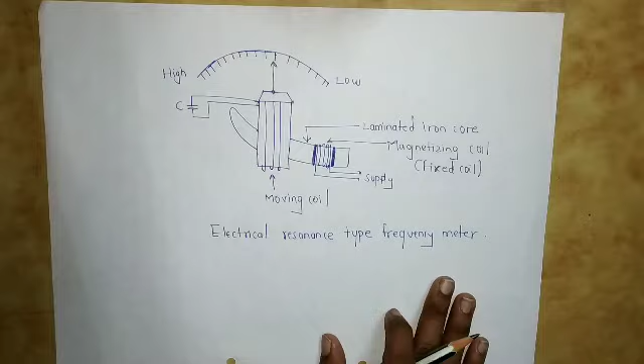We will see the electrical resonance type frequency meter. In the last lecture we have seen the mechanical resonance type frequency meter. Now here, the electrical resonance type frequency meter. A frequency meter is obviously to measure the frequency, right? So we will see the construction and working.

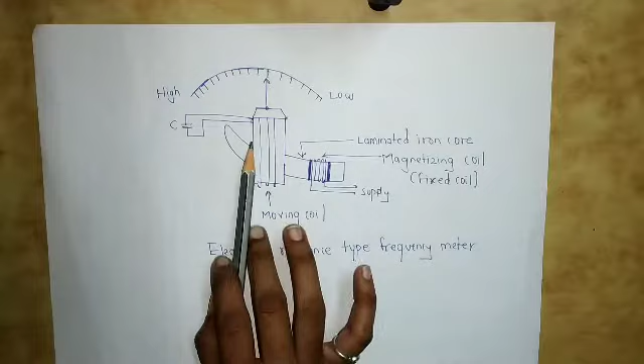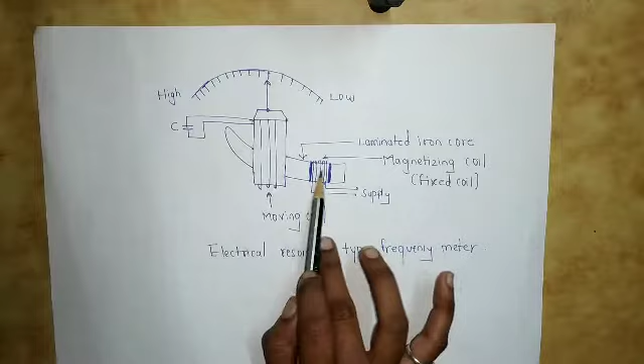It is simple. It consists of a laminated iron core. Here you can see it is the laminated iron core, and this is the fixed coil. This fixed coil cannot move or travel from here to here. It is fixed. So what is the first sentence? It consists of a laminated iron core.

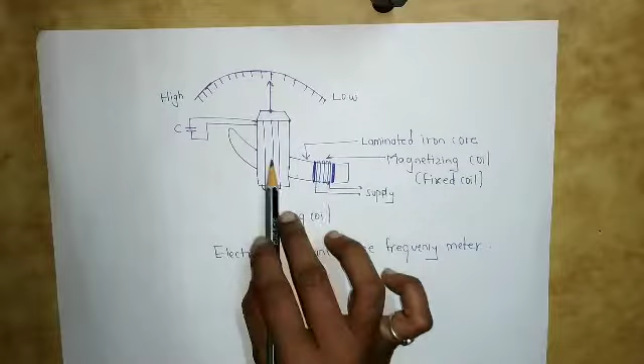This core is laminated, of varying cross section, and a fixed coil is mounted at one end. So this is our core, and here is our fixed coil, which is at one end of the iron core. Now this is about this part, and now this part.

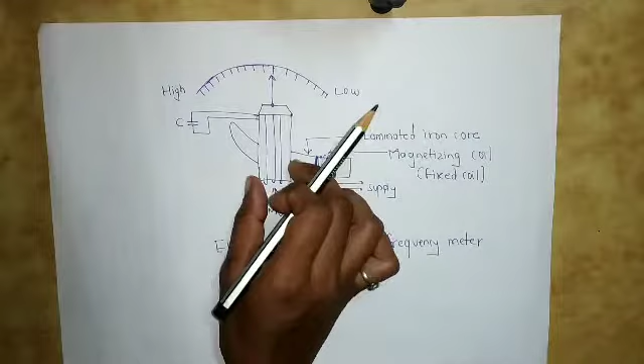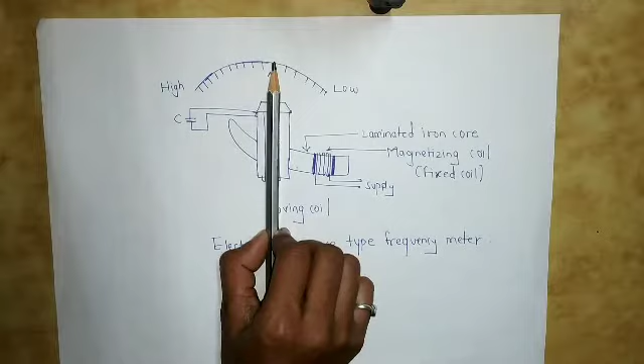Moving coil with a pointer. So this is our moving coil. According to the name, it is a moving coil; it can move. It can travel from here or here, and here is our pointer attached to our moving coil, so that it is pivoted. That means it can freely move or travel over this iron core.

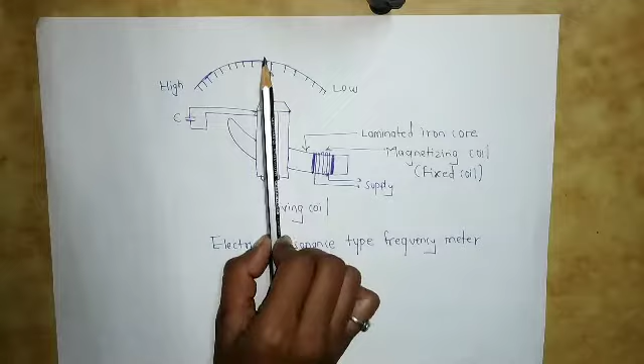So this is our iron core, and this is our moving coil, and the pointer is attached to it. It is pivoted, which means it can travel like this. If the frequency is low, it will travel like this. If the frequency is high, it will travel like this. At normal frequency, it will stay here.

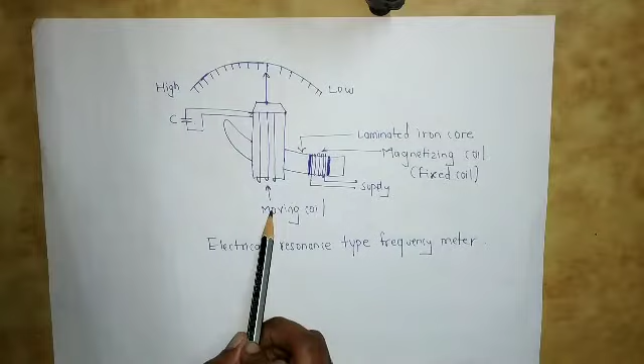The moving coil is connected across the capacitor. From the diagram, this is our moving coil and it is connected across the capacitor C. And the fixed coil is connected across the supply. Whatever supply frequency you have to measure, that supply we give here, whose frequency is to be measured.

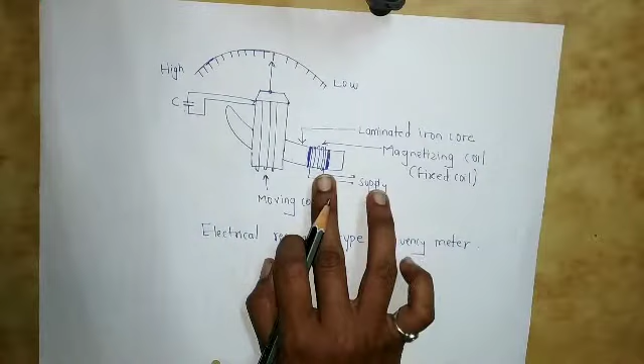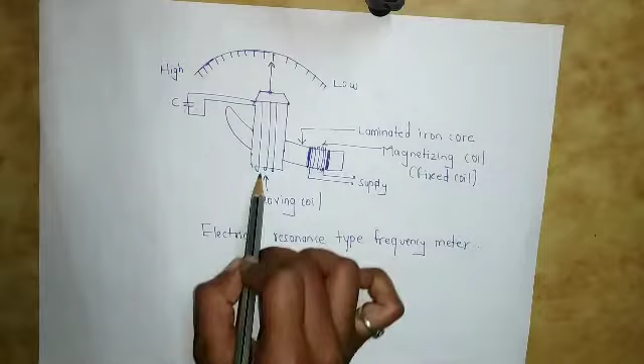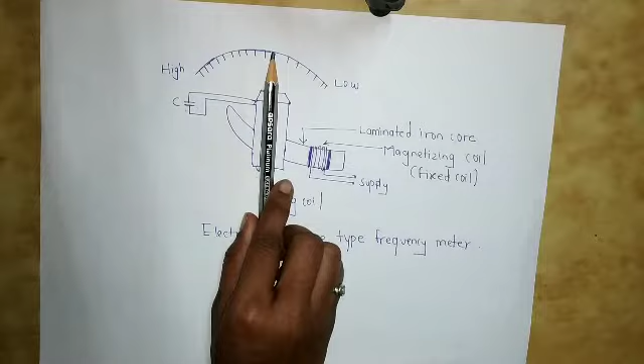So this is the fixed coil, this is the moving coil, and this is the iron core. At one end of this iron core the fixed coil is mounted, and we connect the supply across the fixed coil. This is our moving coil; it can move, and the capacitor is connected to it. The pointer is attached to this moving coil, so it is pivoted and can freely move over the iron core.

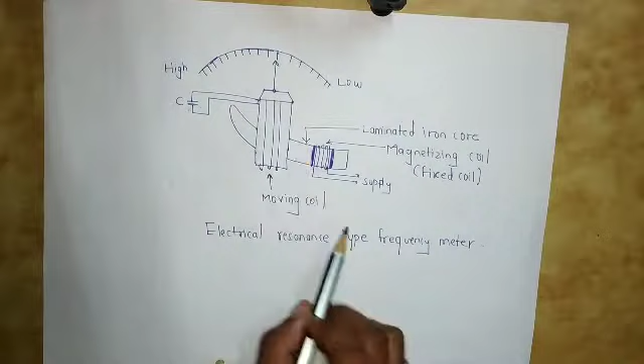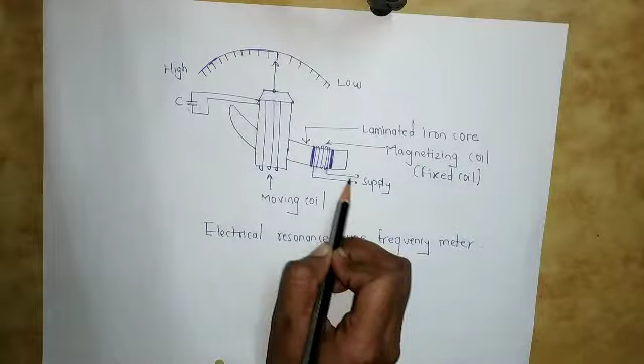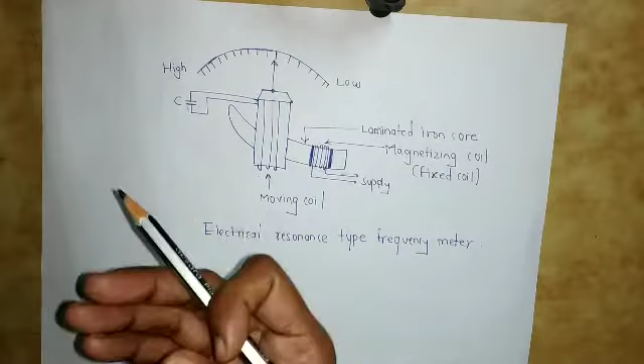Now when the magnetizing coil, the fixed coil, is connected across the supply circuit, what will happen? Current will flow, a magnetic field will be created, flux will be created, and due to that an EMF will get induced in our moving coil. Are you getting the point? Due to this, a certain force is created or developed on this moving system.

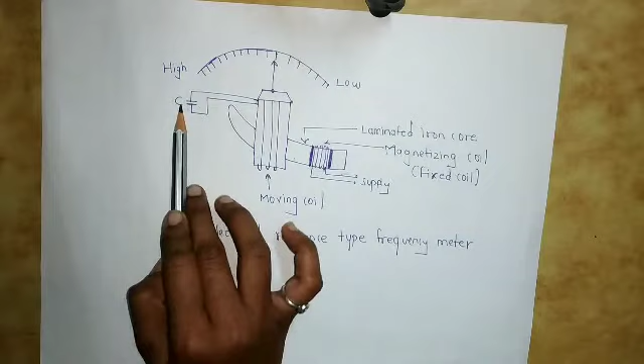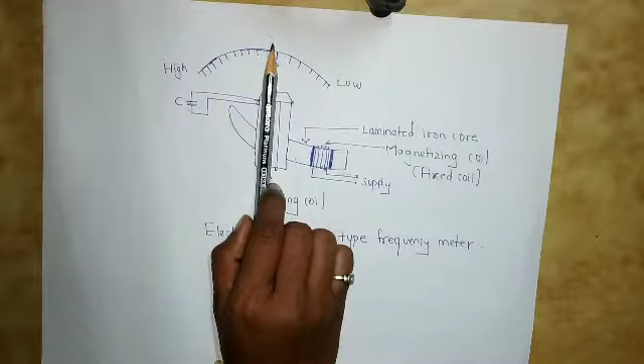So here we have connected the capacitor. The value of this capacitor is chosen in such a manner that whenever the frequency is normal, it will show the mean position. Whenever the normal frequency is connected, it will show the mean position. So what is the sentence here?

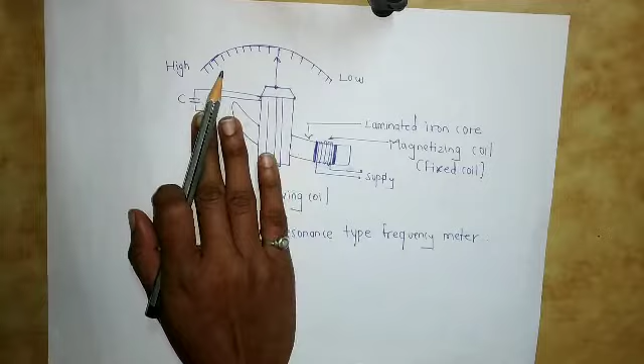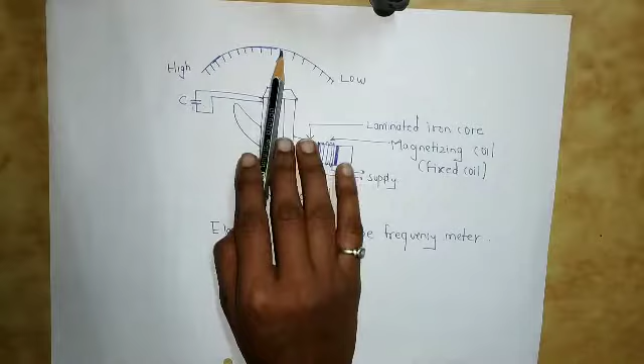The value of this capacitance is chosen in such a manner that whenever the frequency is at its normal value, the pointer or coil occupies the mean position on the iron core. It will get stable at this point; it will not show high or low. But if the frequency is high, it should indicate a high value, and if the frequency is low, it should indicate a low value.

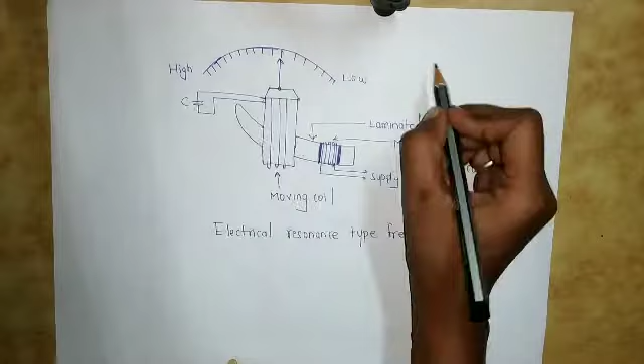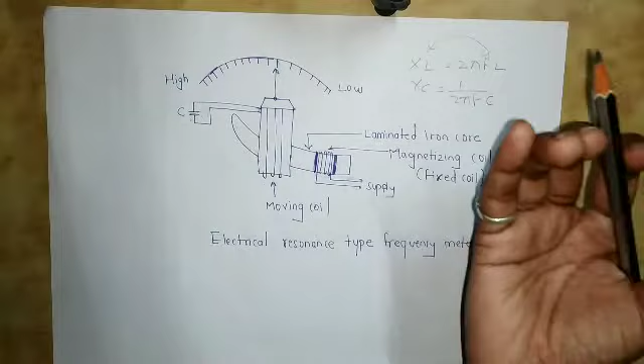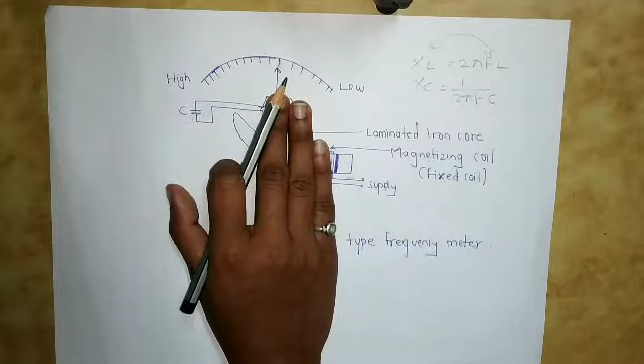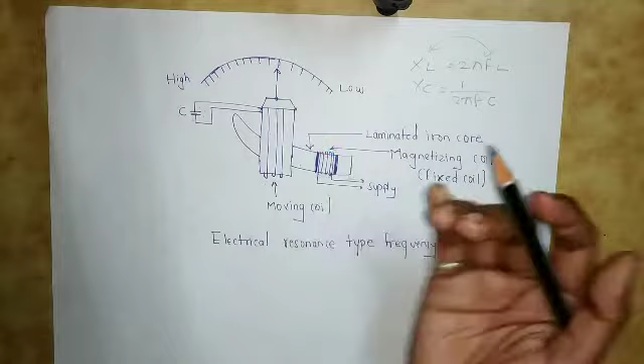We know the formula: XL is 2 pi FL, and XC is equal to 1 upon 2 pi FC. Whenever the frequency is high, since XL is directly proportional to frequency, the inductive reactance XL is larger and XC will be lower. That means our circuit will become more inductive, and XC will become low.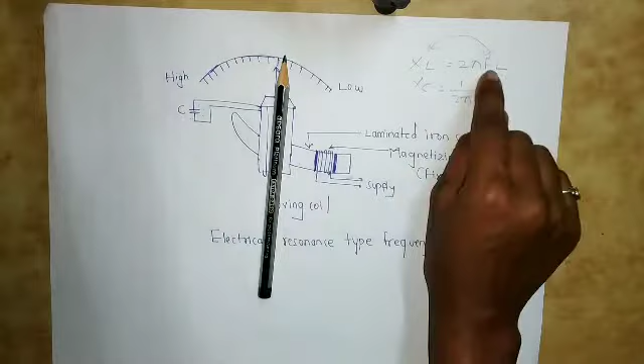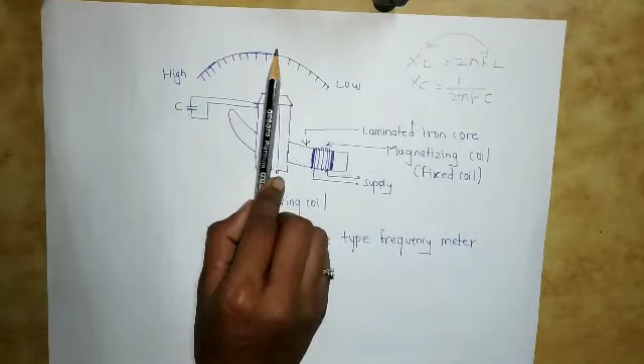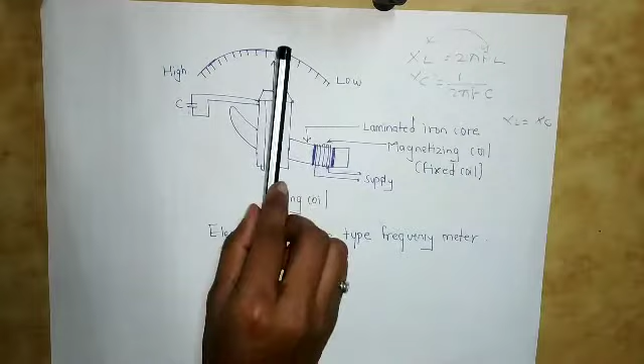So our circuit becomes more inductive. Due to this high frequency, XL is more, so it will show the high value. This moving coil will deflect away from the fixed coil, such that it will try to maintain XL equal to XC. So this pointer will show the high frequency.

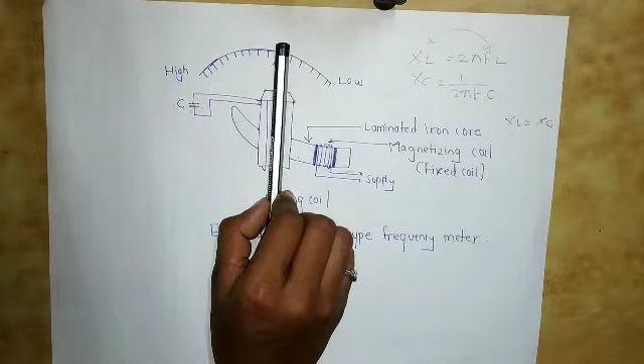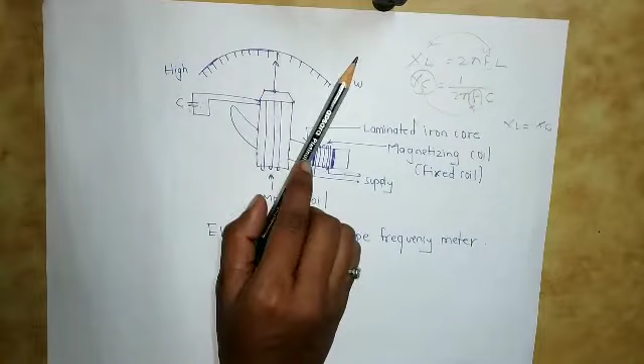Now if the supply frequency is below the normal frequency, what will happen? XC is inversely proportional to frequency, so if frequency is low, XC is high. That means our circuit is becoming more capacitive, so our frequency meter must show low. The moving coil will move towards the fixed coil, and the pointer will indicate the low value.

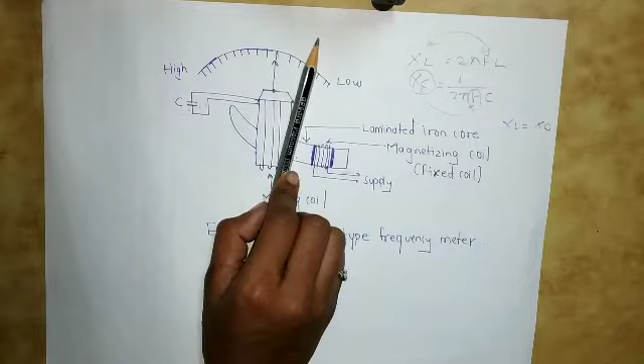So this is about the electrical resonance type frequency meter. This is the theory about it.